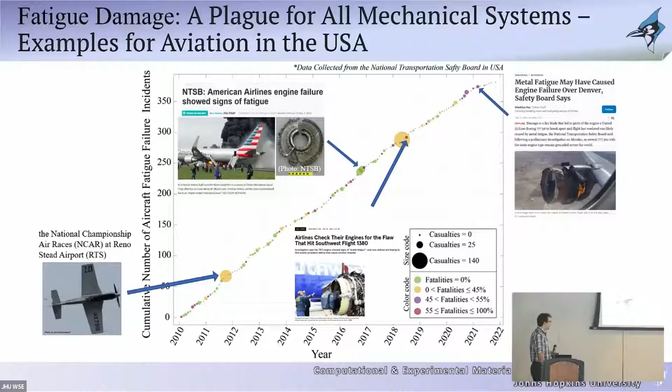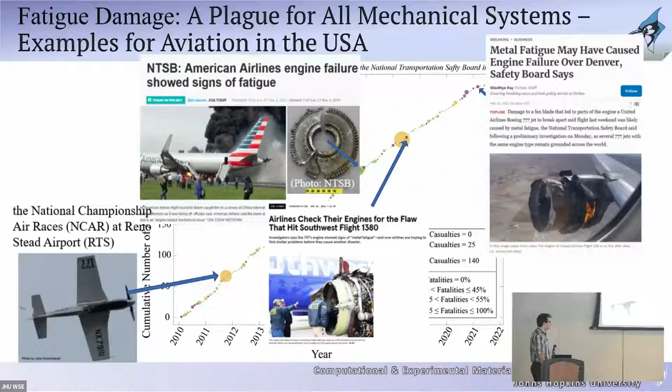Aviation, it's a dangerous process. Maintaining the life of people that are on these aircraft is something that is of significant importance. So it's a very important topic that is still influencing a lot of the work in the world of aerospace and material science engineering. So that's not the only example. There's a lot of different examples, a lot of big incidents that happened over the last 10 years.

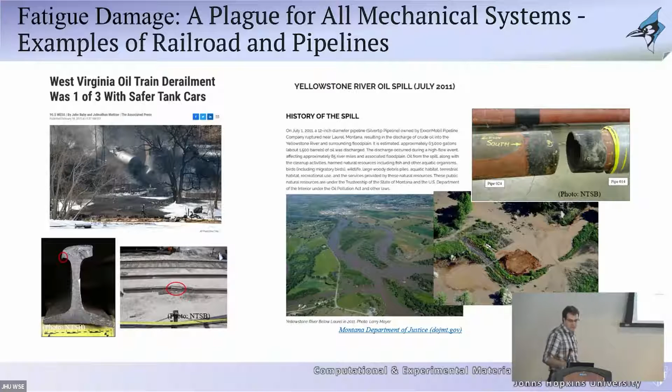These happen very commonly. If you go look at NTSB reports about incidents and look through their database about fatigue issues, there's tons of them that happen very commonly that affect our everyday life. So fatigue is a very important topic, and for those that don't know what that means or how it leads to deformation and failure in metals, this is a simple representation of what really happens in fatigue. The simplest example is this idea of a paperclip.

It's the cheapest fatigue experiment you could do in your office. Get one of these paper clips and just start bending it. Before you bend them, the surface is quite pristine, quite flat. And as you continuously bend it, the surface where you're doing that bending starts roughening. That roughness continues to increase with increasing numbers of cycles until eventually a crack nucleates and propagates and leads to failure. This is actually an experiment that one of my students did just to show this.

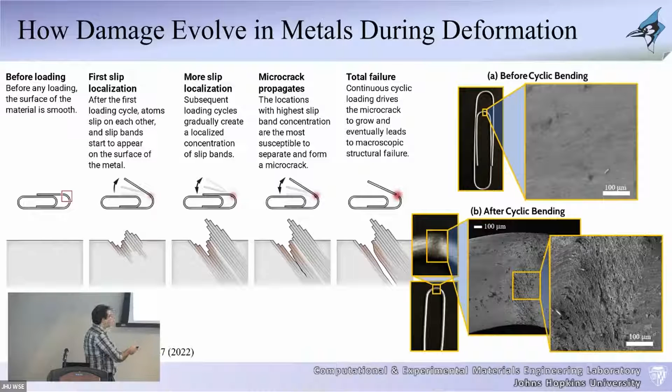He has a paper clip. He bent the inner portion here and eventually led to fracture. But before fracture and before he did the bending experiment, he took it inside the SEM, and again after the bending experiments, and you can see that transition from the smooth, pristine type of surface to a very rough surface. And zooming in you can see all these types of cracks that are forming. These are the precursors that eventually lead to this larger crack that propagates and leads to failure.

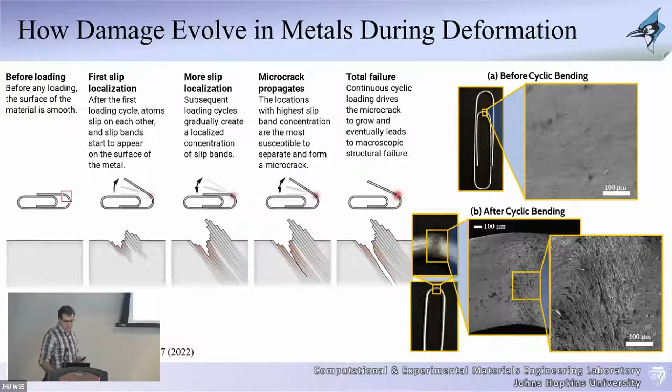This happens in all types of metals. It's a very similar behavior. So this is just a quite nice example to show what that behavior is. So what leads to this? To understand that, you need to understand that metals are multiscale beasts. The structure itself of a metal is multiscale, and the deformation mechanisms are multiscale in length and time scales as well.

You can do experiments on trying to understand the atomic scale information, the defect kinetics, the subgrain kinetics of defects, the crystal level information, as well as the structural level information. However, unfortunately, in the world of understanding, it's very difficult to be able to really design on the modeling track, taking into consideration all these behaviors that happen at the lower length scales.

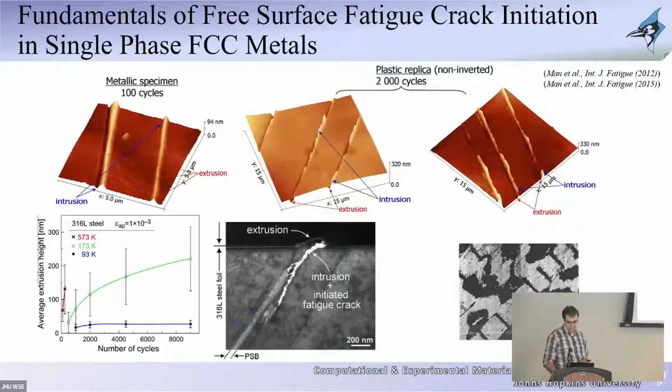It hasn't been necessarily quantified, because a lot of these experiments have been done on a large scale. You take a big sample, you test it, you stop, you go in, you look at the microstructure, you try to understand what's going on. So you don't have an actual view of how the deformation is evolving in these materials. And this has been basically the issue.

So if you look at the life of any component in service, whatever application that is, and we're talking about metallic components here, if you have an undamaged material that is pristine, just came out of manufacturing, and now it's exposed to this type of cyclic loading, what happens is that initially the damage will continuously accumulate into the material as the number of loading cycles increases. Eventually there is a stage of saturation where nothing really changes much in the material.

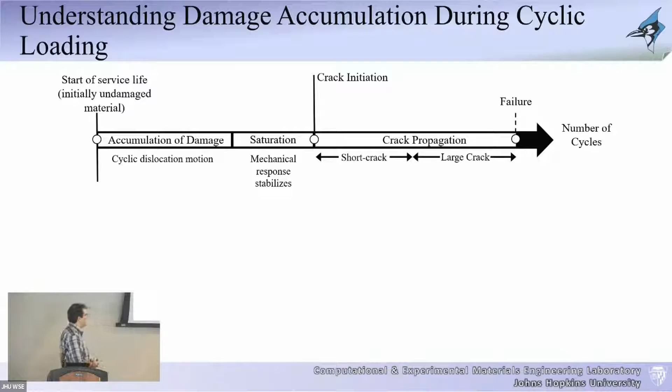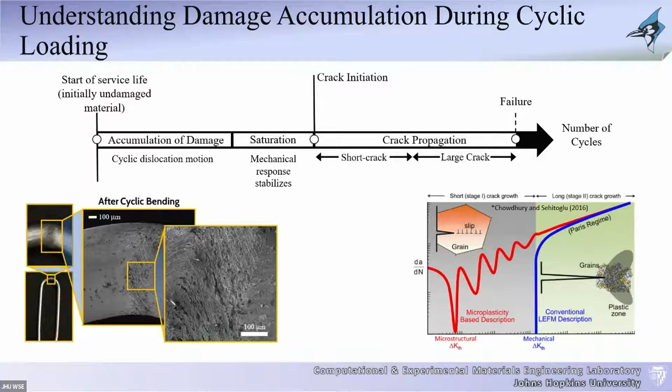Eventually, some of them will dominate, and that's what leads to large cracks, and then the large crack propagates until you get complete failure. Now, we understand in the mechanics world, in the materials world, quite well, and we can actually predict quite well this behavior, the large crack propagation and failure. So this can really be classified using what is known as the Paris regime or Paris law.

And you can really quantify and predict when failure is going to happen if you have a large enough crack that you can measure and quantify. Everything that happens below that, we have very little understanding of how they all correlate together. How does the accumulation of damage lead to saturation? What happens during the saturation that eventually leads to crack initiation? How do the cracks eventually propagate when they're short, that eventually some of them become those large cracks and propagate?

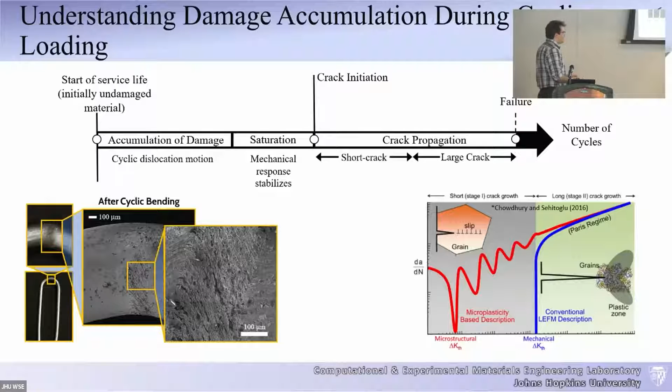And you would notice that typically in a lot of cases, again, depends on the loading regime that you're talking about, but in a lot of cases, the component itself is spending a significant amount of time doing this, not doing that part. Typically, when you're getting at a large crack, that's pretty much it. You replace the component, and you move on. So it's very difficult to really be able to build that entire picture.

If you look at the length scales of interest, what we're really interested in is trying to develop physics-based models that allow us to upscale from the atoms to the coarse grain level where we can look at numerous defects in the sample, such that we can upscale information related to the physics that happen in these scales into the upper length scale of crystal plasticity that eventually can lead to full component prediction later on in the design cycle.

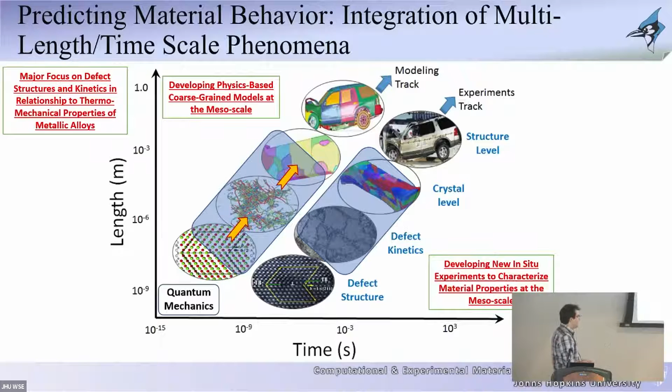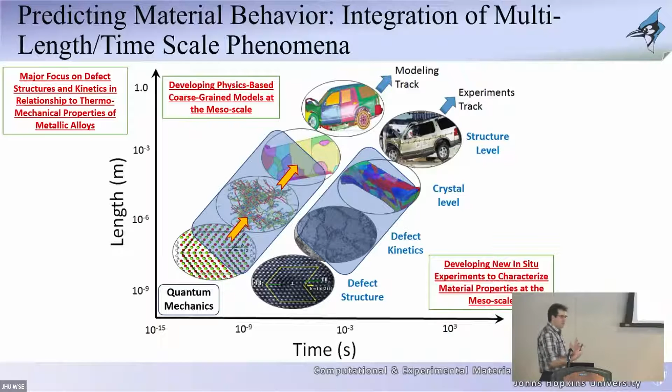Another topic of interest in my group is really trying to develop in situ experiments that we can use to characterize the mechanical properties at these length scales. And the reason that I'm interested in these types of in situ experiments is for two reasons. One of them is that you can actually extrapolate a lot of physical information about defects during deformation at these length scales if you're able to do these experiments in situ, and that's going to be really the focus of my talk. But in addition, they allow us to directly provide a validation to the physics-based models that we're predicting, such that eventually all of that hopefully will lead to better predictions of structural level deformation and failure of different types of components.

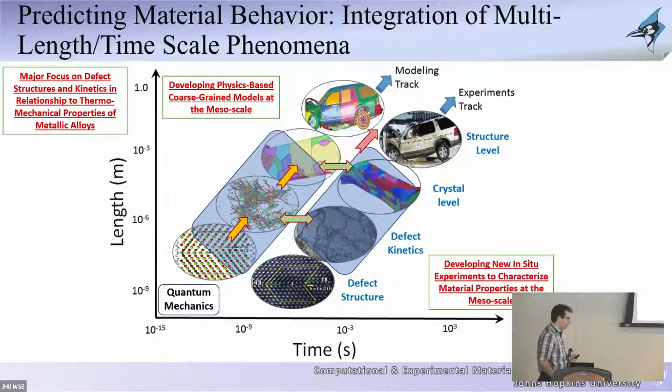The track that I'm going to show you today is really on this side, and I chose the experimental side for a specific reason. My background really comes from modeling, and as I said, with Nasr Ghoniem, all my work was modeling. The reason that I actually decided to do experiments is that the experiments that I'm going to show you today, I've been told by everyone that does these types of experiments that they're impossible to do. And the point is that I wanted to bring this up to the students. Don't ever believe someone if they tell you it's impossible if you think that you can actually do it. And I'll touch base on that when I get to the end. So it's something that really drove me into this, and it is actually my mentors that ended up pushing me to say, oh, you should be able to do it on your own.

So what is the problem? What are we trying to do? So what I'm trying to do is really try to quantify any distinct signatures that either control or precede the initiation or the evolution of plasticity, crack initiation, and short crack propagation. So this is basically that entire regime where we still have a lot of open questions of how they end up leading to crack propagation and failure.

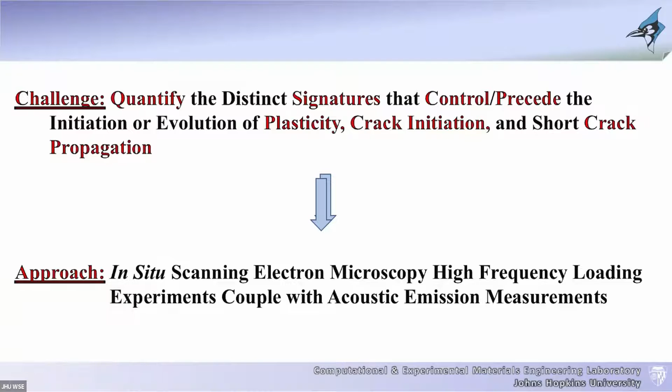So the idea of how we can explore this came to me through trying to design in situ experiments inside what is known as a scanning electron microscope. This is a microscope where you use electrons such that you can actually visualize materials at the micron and submicron scale. And what we've ended up doing is we had to design this type of experiment, which is a high frequency loading experiment coupled with acoustic emissions, because I think we can extrapolate a significant amount of information through these types of experiments. So what are these experiments?

You can fabricate specimens inside a bulk sample. So this is like a millimeter thick substrate of any material you're interested in. You fabricate these type of pillars in them. They can have pillar geometries. They can have dog bone type of geometries, depending on what you're actually trying to answer or type of experiment that you're interested in. And then you can do these experiments in compression or cyclic loading or in tension and so on and so forth.

There's a lot of information that I'm going to skip just because of the time and given that this is not an entirely technical talk, but more of a general audience type of talk. There's a lot more information in the publication over there if you're interested in the details of how we actually do cyclic loading, how we set up a setup where we can do these experiments such that we can do fully reversible experiments inside an SEM.

So the two things that I was told are impossible to do: how do we actually mount a sample so that we can do fully reversible tension compression that would mimic what people do in a bulk experiment. The other one is SEM costs us $70 per hour. So if I want to reach millions of cycles, which is what happens for these materials when they fail, I need to do this fast because I don't have enough money to pay $70 an hour for a few weeks. So the way that we do it is using high frequency loading, which is an intriguing approach that existed for a while, but apparently no one had implemented it into the small scale world, which was quite unique when we published this work a couple of years ago.

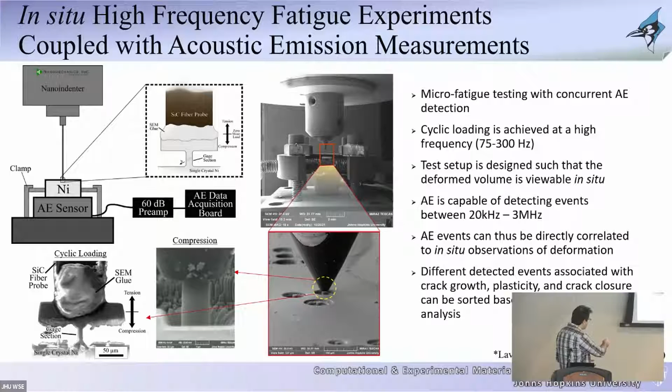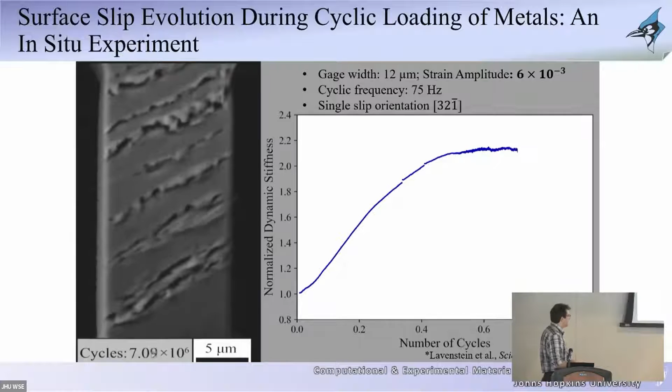Why along those specific lines? That relates to the orientation of the sample that we chose. Slip typically happens along specific paths in metals, so we know where the direction of that slip is likely going. Now what you're seeing on the right here is an interesting plot as well. Initially when nothing was happening, this was a strain hardening behavior. The dynamic stiffness was continuously increasing. This is known classically in fatigue, that materials harden when you cyclically load them, but without significant apparent damage on the surface.

And it's only when that first event that happened with an extrusion, that's really about here when the curve started becoming nonlinear. And eventually that leveling off, that's what is known as saturation again in the world of fatigue. The leveling off is when there's not a significant amount of apparent change in the surface roughness of the sample, and there's no apparent significant amount of hardening that is building up in the material either.

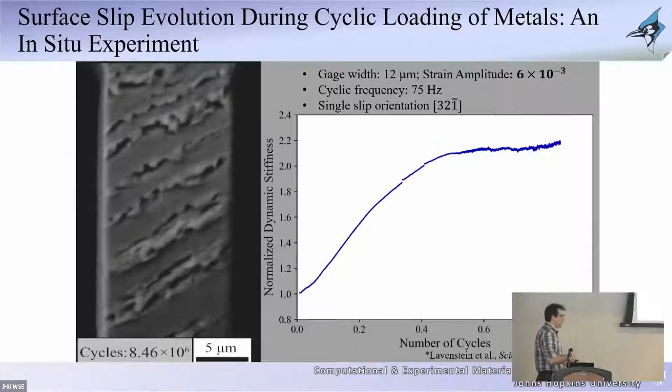So first, it was quite unique in the sense that this experiment basically allowed us to see the nucleation and the evolution of these slip bands. And just to show you what the sample looks like after deformation, this is a 3D view of that same sample. And this is basically the sample after 8 cycles versus after 8 million cycles.

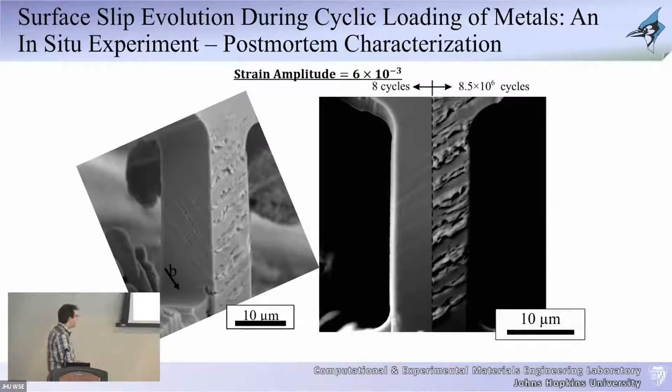And you can clearly see each one of those precursor slip events that happened on the surface. The sample was initially flat. There were no apparent slip bands forming on it. After 8 cycles, you start forming them, and then they stabilize for a while as the material continuously hardens, and then eventually all these slip traces form on the sample, and each one of them is actually associated with interior

cracks that are propagating. So what we did is we cross-sectioned this sample. If you look through the cross-section, what you see is these cracks that are forming along each one of those bands. And these are these small, short cracks that initiate in the material. Not each one of them is going to propagate and lead to failure. Eventually, one of them is going to dominate and lead to failure, as I'll show you in the next slide.

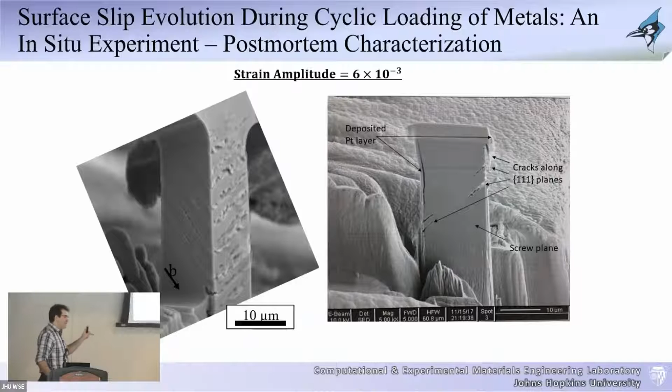Now, the reason that a lot of this community in the small-scale world did not necessarily try to go down that length scale is that a lot of people would argue that whatever behavior you're seeing at these length scales, which is still quite large, 10 microns to me is quite large, there are a significant amount of size effects and the deformation mechanisms are different. What we showed with these experiments is that actually is not true.

The exact same type of formation of persistent slip bands forms, the type of crack propagation along the outer boundaries of these persistent slip bands forms, very similar to what you see with these types of dislocation microstructures that are observed in bulk scale. These are the classical bulk scale experiments that people understand in the world of deformation and fatigue.

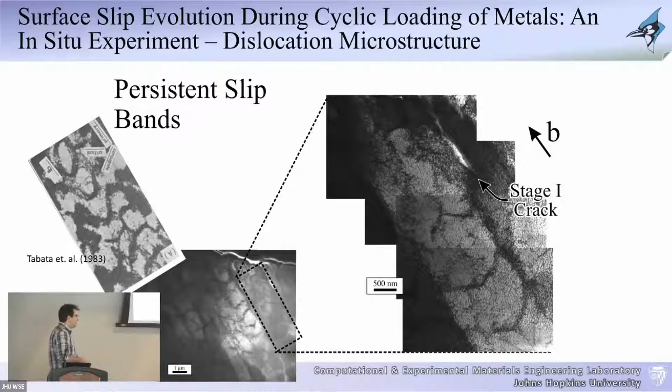So what we're showing with these types of experiments is that, yes, there are size effects. We are going down in the scales. The life of the component actually is prolonged. But nevertheless, the types of mechanisms, structures, and defects that form are exactly similar and mimic what you see in a bulk experiment. And thus, this allows us an opportunity to do these types of experiments to understand what deformation and failure happens.

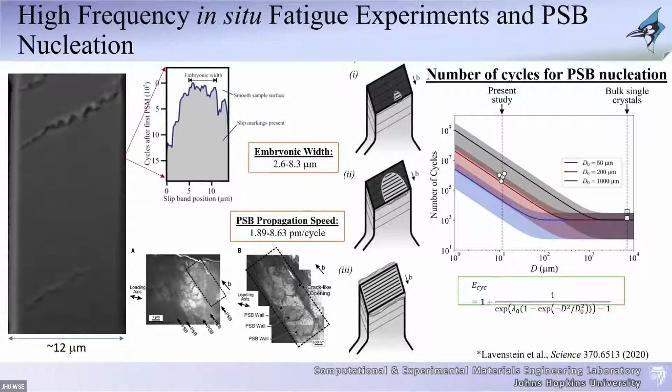So this is another intriguing analysis that we were able to do. Through image analysis of what we're seeing on the surface, we could take one of these bands, and as you see, there are 2 features. One of them is that they pop up with a certain width, so we can quantify that width. And across the different experiments that we did, the embryonic width, which is basically the initial extrusion on the surface, seems to range between 2 microns and 8 microns for the sample sizes that we've been looking at.

In addition to that, we can actually quantify the speed as these bands form on the surface and propagate, extending to both corners of the sample. We can quantify the speed of propagation of these persistent slip bands. In bulk experiments, interestingly, they have never been able to calculate this. One reason is because you don't really see the evolution of them. So this was quite unique, giving us that ability to first be able to observe it.

Now, we've been able to quantify, or at least physically explain, what we think is happening in it. We still cannot see what's happening internally, but we think that the reason why you get these different sizes of embryonic widths of these persistent slip bands hitting the surface really depends on where they nucleate relative to the surface.

And given that the minimum size that we've been able to observe is 2 microns, that basically indicates that they always nucleate internally. They don't nucleate on the surface. We never see something that is much smaller than 2 microns and propagating. So that basically indicates that they have nucleated internally, propagated to the surface, and then they continue to evolve until they span the entire cross-section of the sample.

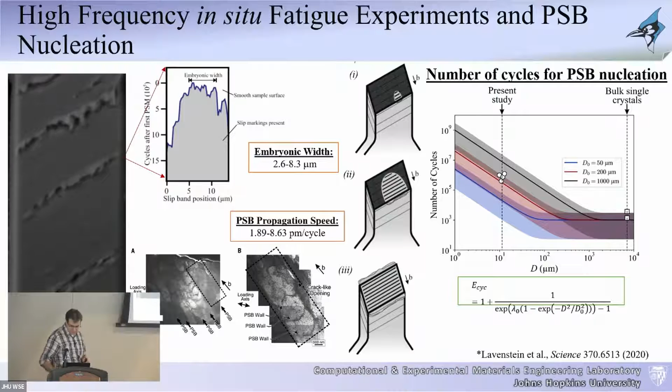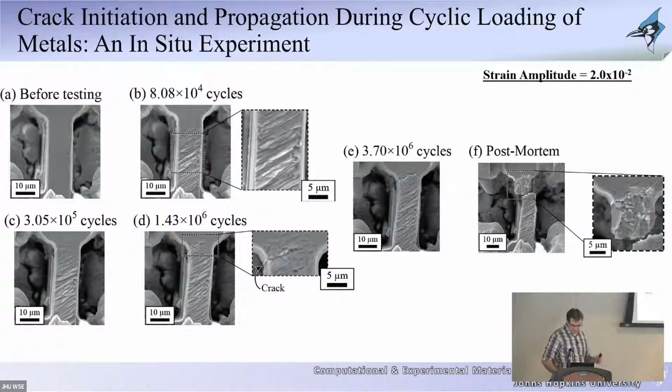Now, if you look at the dynamic stiffness measurement, which I showed you before, we're skipping up here to a point very close to where that big crack initiated. And what you notice is that the dynamic stiffness had been continuously increasing, and then eventually a crack initiated. This is where we first observed that crack forming on the surface from an external observation. And eventually, as the crack continuously propagated, the stiffness started dropping, which is a common thing that you would observe. But then we thought, okay, how do we actually extrapolate information related to how these cracks actually propagate? So we stopped the experiment.

This was done through what is known as a constant strain amplitude, and we decided to drive this experiment with a constant load amplitude, because when you do load amplitude control, you can actually measure the amount of displacement and the changes in the displacement associated with the crack opening or the crack closing. So if this dynamic displacement is flat, that basically means that at the same constant loads, the crack is not propagating at all. But if it increases, that means that the crack is actually opening, because now it's much more compliant, so you can get more opening. And if it's decreasing, that means that the crack is closing.

And intriguingly, if you look at this behavior of the dynamic displacement versus number of cycles after we stop the experiment here before full fracture, you start seeing different types of behavior of that crack. The crack is level, nothing is changing for a while, and then suddenly an increase. Nothing changing for a while, suddenly an increase. Nothing changes for a while, and then suddenly the displacement decreases, which indicates that there's actually crack closure that happens as you continuously cycle the sample. But in addition, it's clear that the crack propagates through an avalanche-like behavior. The cracks propagate, stop, propagate, stop continuously. So this was quite intriguing for us to visualize and to measure these types of quantities and statistics associated with it, which I'll skip for now.

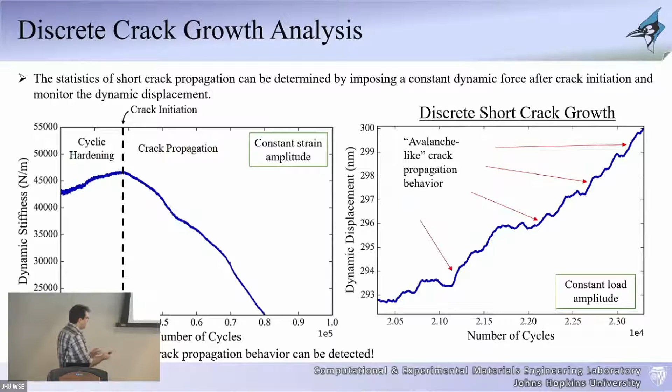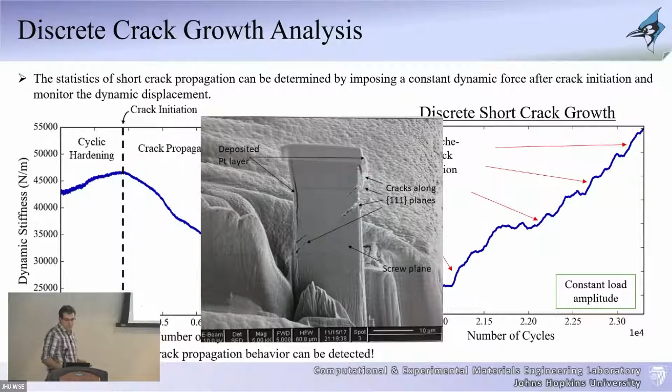Because when we were doing this work, what I was actually interested in is identifying what is happening internally in terms of all these cracks that are nucleating, and what leads to one of them dominating and eventually leading to fracture. This entire experiment, although it was quite exciting when we were doing it, I realized at some point it's not really giving us that information. I'm observing a crack on the surface that is the dominant crack, the large crack. I'm not able to actually observe the small cracks. As you see, there's a lot of small cracks that initiated before that dominant crack formed. So then the question popped up of how do we actually look at that behavior? And I'll mention something here that relates to it.

So earthquakes. Earthquake behavior is exactly similar to plasticity in metals. All it is, you have earth plates, and what happens is that you get sliding of those plates relative to one another. There's different types of earthquakes. One of them could be related to normal faulting, where you get the two plates shifting up and down relative to one another.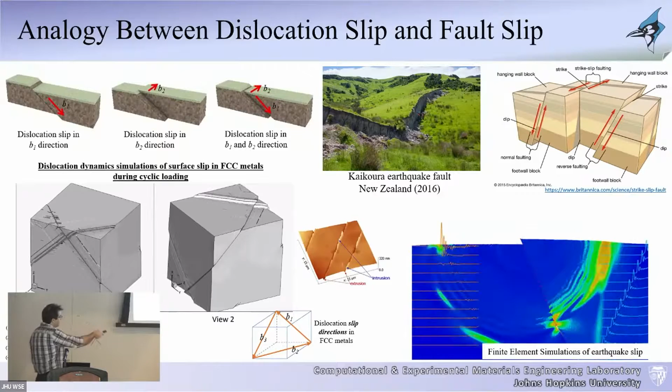So that's the slip extrusions that we see in the metals. Again, metals, the way that they deform is through slipping. And these types of deformation that you're seeing over there, which I showed you and called fault slips, these are nothing but dislocation slip in the world of metals. The major difference is that in metals, we have specific slip directions that are predefined depending on the orientation of the sample. This is a representation of a simulation that shows how these slip traces form when you cyclically load a material. So this is a reconstruction from a discrete dislocation dynamics simulation.

In the world of earthquakes, they do these types of measures as well, and they can actually measure the type of slipping that happens. But in addition, what they're actually interested in is these waves that are emitted associated with the propagation of these events. In the world of dislocations, it's very similar. The motion of these dislocations as they move, that slipping that happens in the material, induces an acoustic wave in the material. And that acoustic wave you can actually measure the same way that they do in earthquakes. They put sensors all over the place, they measure the displacements. That's exactly what you can measure with dislocation plasticity.

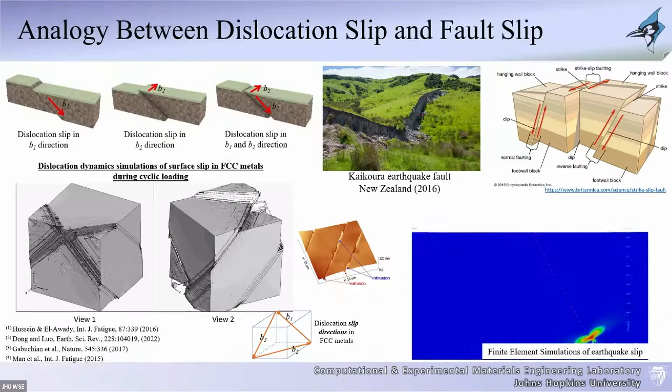So this is where the acoustics came into play. Because with acoustics, the neat thing is that the acquisition rate, the response that you get from those sensors that you put on the surface, is on the order of 30 megahertz. The loading stages that we have, when we simply look at the load displacement, the acquisition rate typically is on the order of a kilohertz. So it's a significant amount of information that you can extract out of these types of acoustic emission measurements.

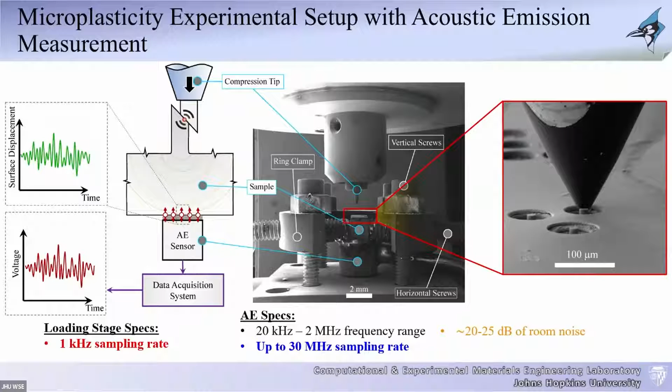Now, there are a few issues associated with acoustic emissions. There's background noise that you have to deal with, but there are ways to overcome this behavior. So the only difference here is that we basically have an actual acoustic sensor attached to the samples that we're interested in, and we can measure any acoustics emitted during the plasticity and the deformation behavior. So this is an in situ experiment. We decided to go simply to in situ microcompression before we talk about fatigue, just because it's a new setup that we tried to implement. So we wanted to understand, can we really quantify acoustics associated with dislocation plasticity?

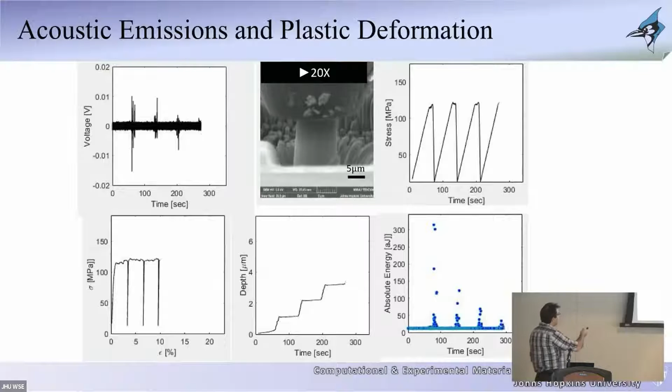So this is an in situ experiment that we have. Basically, this is the experiment. What you're going to see is slip traces that are going to start forming and popping. And every time that pops, you'll see in the voltage signal, which is basically the acoustic signal, these types of bumps that are happening. And what we're showing here is basically the stress versus time. This is regular displacement load calculations.

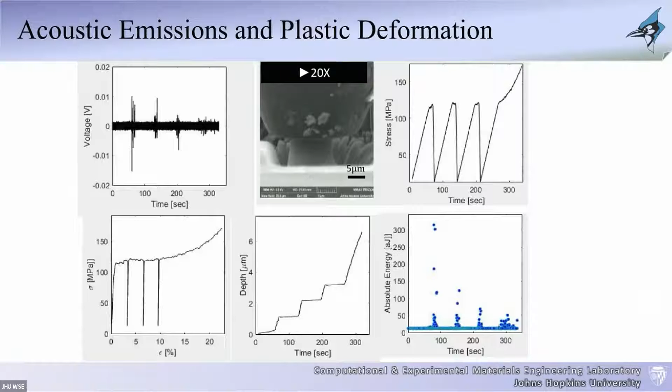But the neat thing with this type of experiment, let me show you a close-up of one of these experiments. So these are basically just representing different stress-strain curves. If you look at one of these stress-strain curves in a very small spot here where there was some type of drop in the stress as you were loading, what you're seeing here is a very close-up of this part right about there. And you can see that the acquisition rate of the load displacement is basically each one of those dots. Every circle represents a feedback that you're getting from your actuator.

But with the acoustic emission, this is what we're seeing during that event. So this is a burst. This is a burst of dislocation plasticity. And during that burst, you can actually see that there are multiple bursts happening internally that you would have never measured with the load displacement only. But with these acoustics, you're actually able to get a significant amount of further understanding of it.

In addition to that, and this is something that you typically don't get from the load displacement. So this is the stress versus time, again from the load displacement curve, versus the voltage, which is basically the acoustics. The straight line here represents the elasticity part.

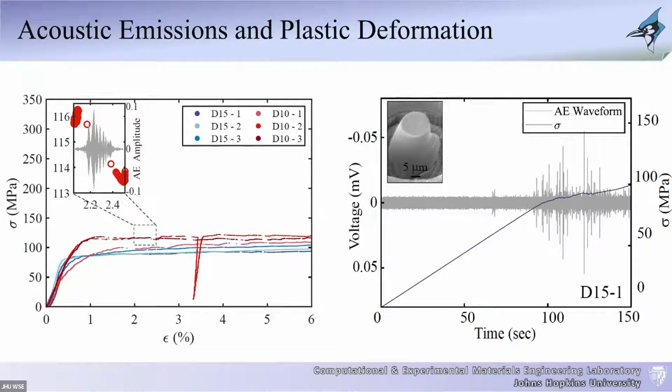What is interesting is you get microplasticity events that happen during the elastic loading, and you can actually measure those behaviors. So this basically starts giving us a significant amount of understanding of events that are happening internally in the material. Because notice now, it's not just visualizing what's happening on the surface, but I'm actually able to hear what is happening internally.

So this is basically a curve that shows you some statistics associated with the measured acoustic emission energies versus time. This is what you would get from the load displacement. You can calculate the burst velocity versus strain. And you can look at the normalized acoustic emission amplitude versus the acoustic emission energy.

Now, the intriguing results, again, there's a lot of data here that I'm not going to go through in too much detail, but one of the very intriguing things is when you look at this curve here, it's color-coded, in this case according to the strain level. You would notice that the blues are on top here and the reds are down here. So the big events, those that are associated with large amplitudes or large energies, these are the big earthquakes that are happening in the material.

They typically happen predominantly at small strains. When you go to large strains, the amount of earthquakes and the earthquakes that you have are much smaller. This, we think, is related to the types of defects that are forming internally that are blocking the earthquakes from having a significant amount of energy or amplitude. So it allows us now to actually visualize the events themselves with a higher fidelity than the load displacement calculations.

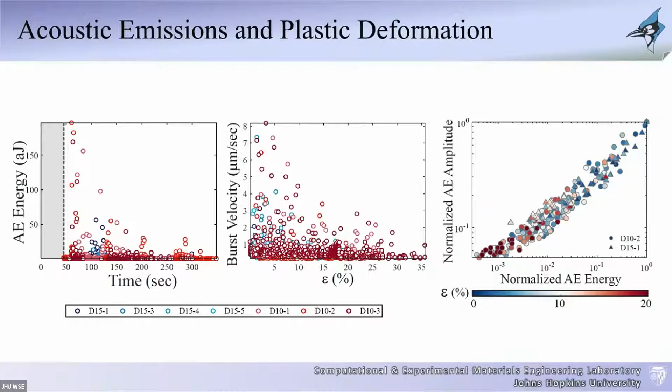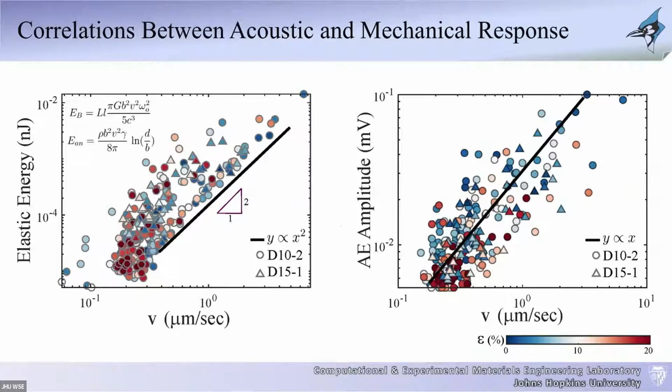I should say all of this is actually brand new work that Mustafa has been working on. So this is still unpublished, and we are still doing a lot of analysis on these data. Another intriguing thing with these types of calculations is that you can go into literature. Literature has tons of theories associated with acoustics related to dislocations, and none of them have been measured, none of them have been quantified.

But this allows us, going down to the scale of microns, to go down to the scale of individual defects, and to go in and quantify those types of theories. Are they correct? Are they not? Do they represent the behavior, or do they need a significant amount of understanding?

So this is an example of the energy versus the velocity of dislocations, which basically says that the energy is potentially related to the square of the velocity. From our data, you can see that that behavior generally happens. You still get y proportional to x squared, but there's a significant amount of scatter in the data as well that these types of models do not represent.

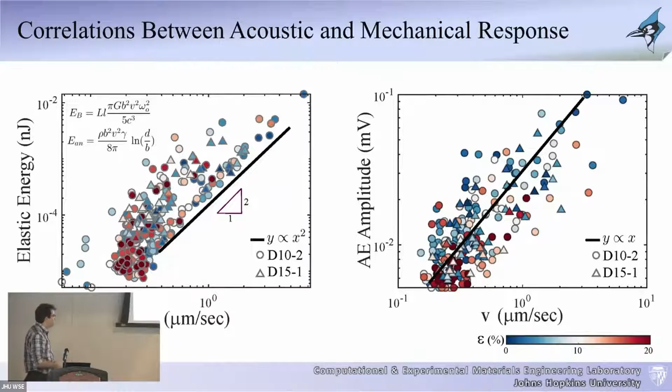So the big question is, how do we actually take this type of representation, where there's a significant amount of scatter in the behavior, into these deterministic types of laws? We think machine learning could potentially help us come up with a better understanding of these types of behaviors.

Taking this a step further and learning a lot from what happens in earthquakes, you typically have this idea of pre-shocks that lead to a main event, and after that main event, you typically have aftershocks. This is really very similar to what we see in metals. So I'm showing you here a single drop. This green dot and this red dot represent what we define as a single avalanche when the material deforms. So this is a stress drop.

And what you're seeing in the background here that is gray and yellow and blue, that basically is the acoustic measures that we have. And you can quantify and see that the biggest event that happened is this black one here, where before it, there were a bunch of smaller events that led to it. And then after that big event, there were a bunch of smaller events that happened after it.

So we can start quantifying this in the sense that these are pre-shocks, these are aftershocks, and this is your main shock event. In the world of earthquakes, there's a significant amount of analysis associated with the statistics of the energies of the pre-shocks relative to the main shock, or the energies of the aftershocks relative to the main shock.

So this is, again, an avenue that we're trying to push forward with, that we think is going to be quite intriguing to give us that better understanding of what potentially is a signature for this main event. Like, what are the signatures associated with these pre-shocks? What is unique about these pre-shocks that lead to this main shock? And then how these aftershocks that form eventually contribute to a next main event as we go forward.

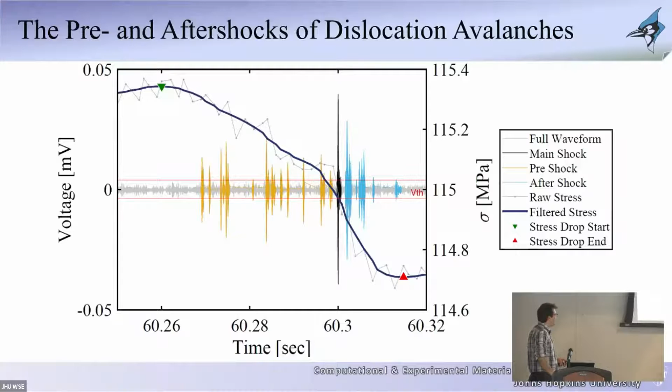So this is, again, as I said, really brand new work that we're trying to push forward with, and we're hoping within the next few months, Mustafa, that we can finish up the analysis and get this done. So I'll finish up with some future perspectives and where I think we are as a field related to this world.

So this is just a funny cartoon, me trying to be funny about fatigue in metals. So, you know, when you're sick and you go to a doctor and you say, hey, I'm sick, they tell you, hey, just take some vitamins and exercise and go home, right? That's all they say. They really don't know what's happening in you as a material, which is really what we as a community in the world of metals face: we think we know what's happening, but it's impossible to really correlate events. So this is a big issue.

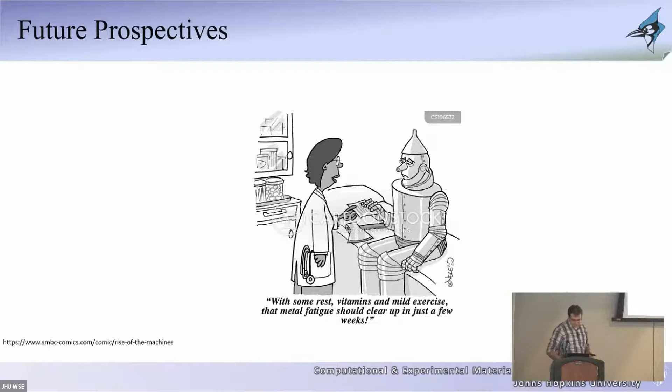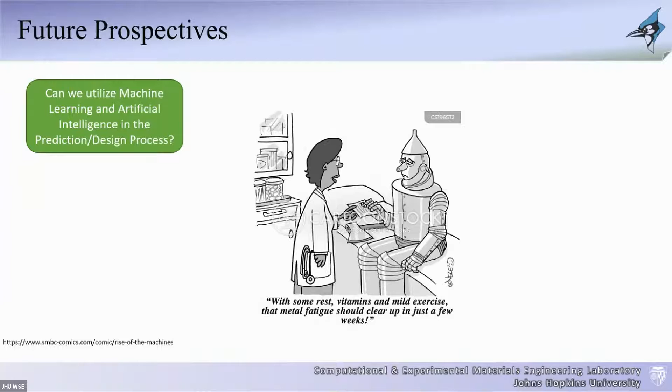So the big question, and this is something that a lot of folks here and in the materials world have been pushing forward with, is the utilization of machine learning and artificial intelligence in that process of understanding, predicting, and design. So this is an avenue that we're going forward with as well, with the significant amount of data that we're generating.

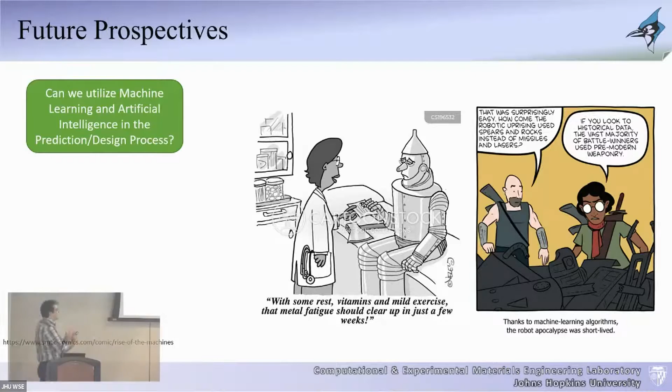The problem is, typically when you look at machine learning and AI, so this is another cartoon that is quite funny. It tells you basically that the AI machines, when they started the war against humanity, started using primitive types of weapons. Why? Because if you look through history, most wars were won through primitive types of weaponry. So the problem is the data, right, is not necessarily the right data that we want to learn from. So you need to be able to really generate the data that is very relevant.

So the future perspective that I have is really, you need to be able to develop these types of unique tools that enable you to quantify deformation and failure at the proper length scales and time scales that matter. You need to be able to connect those experiments with unique forward modeling efforts. So this is the physics-based modeling, which I didn't talk about, but this is another branch of what we do in the group. And that gives you potentially a significant amount of data that you can then use to really learn and come up with an AI process that is actually meaningful on meaningful data. So this is my perspective of where we are and where we're hoping to go.

I did mention in the abstract of the talk that we were trying to do reconstruction based on the acoustics. This is work that we're doing with Tamer Zaki in the mechanical engineering department, where we're trying to utilize machine learning on forward models that predict the acoustics, knowing the defect structure that led to them. Can we reverse the process and say, if I have the acoustics, can I reconstruct the material? And there is very promising work on that front that we hope will couple with these experiments so we can extract further understanding of the underlying deformation mechanisms. So this is my scientific talk.